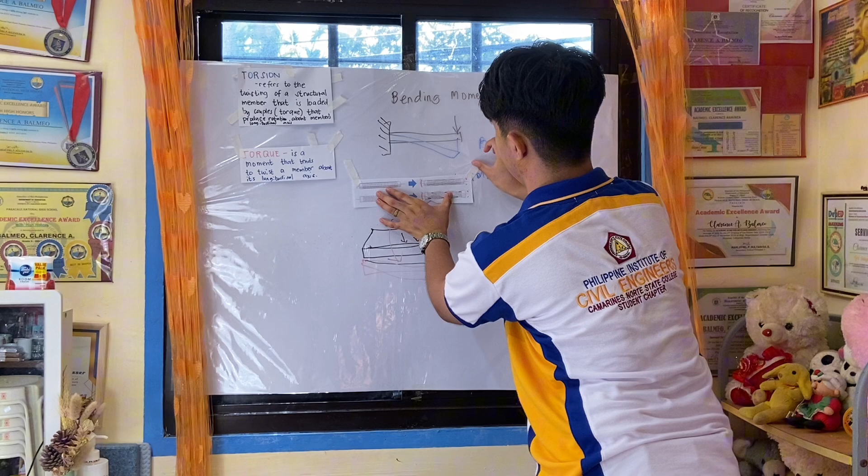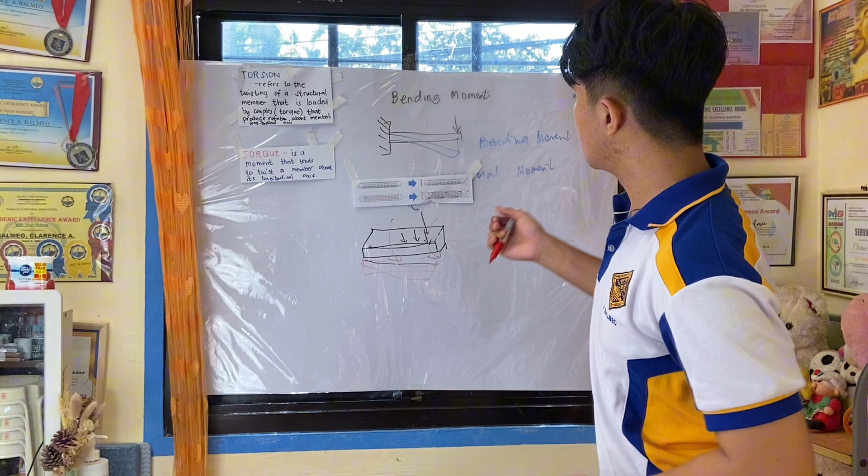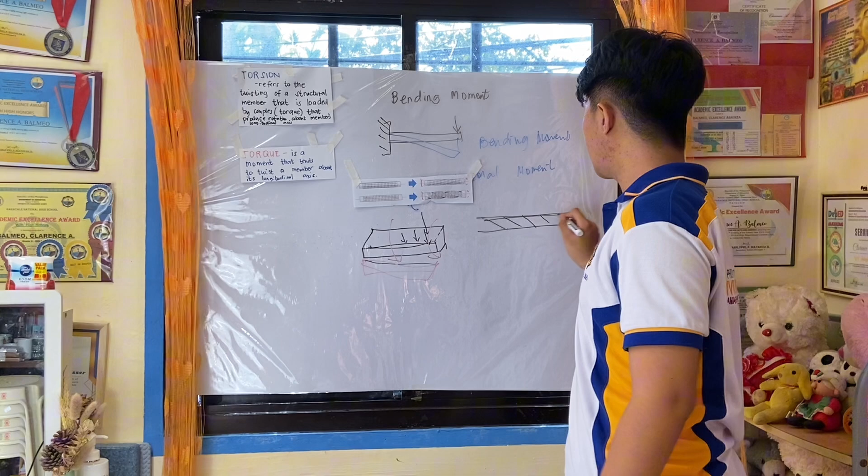As we see in the figure, since it's a circular shaft, when there's torsion or a twisting moment, the lines on it form a helix structure. The lines just become a helix, but the cross-sectional area here is still a circle. Remember that, class, it just becomes a helix, like a DNA strand. See? When we twist the circle, it looks like it became a DNA shape, but it's still a circle.

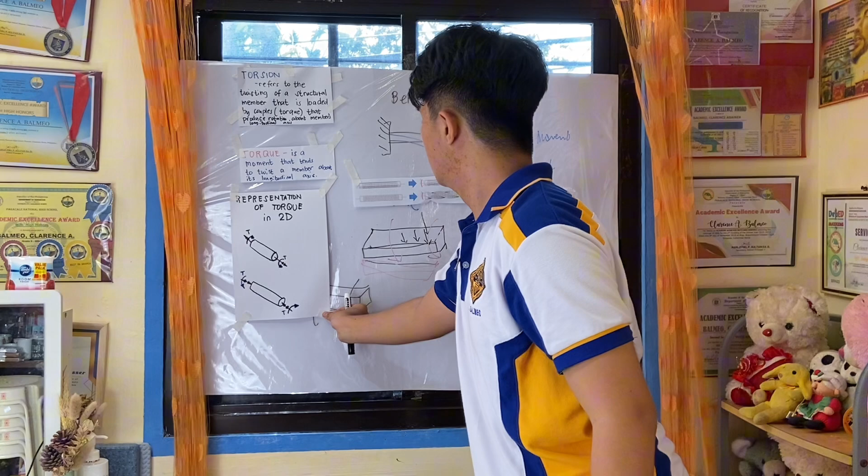So, to represent torque in 2D, here is the image that I will present to you in 2D. This is where the right-hand rule comes in.

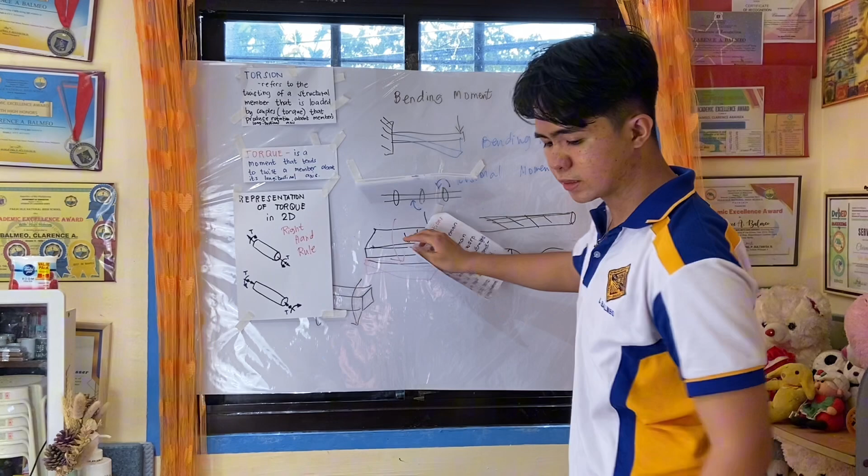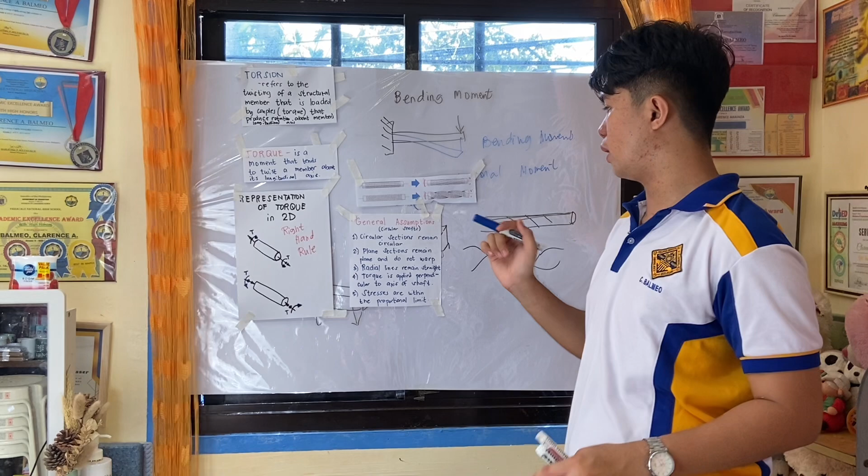Assumption number 2: plane sections remain plane and do not warp. This is similar to number 1, wherein there won't be warping, as shown in this image. So the cross-sectional area of circular shafts won't change.

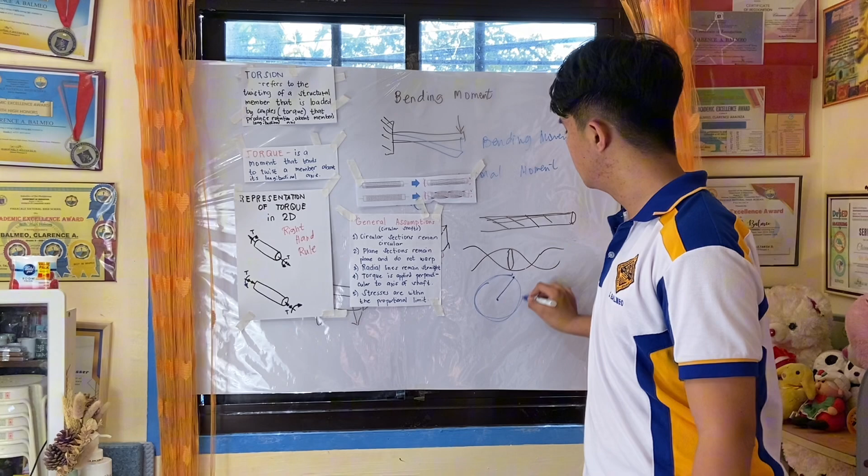Assumption 3: radial lines remain straight. So what are radial lines? This is important later in analyzing the formula. The radial lines, for example here in the circle, go from the center of the circular shaft to its perimeter. From the center to the perimeter, that is our radial line. You know the word radius, right? So this is simply the radius.

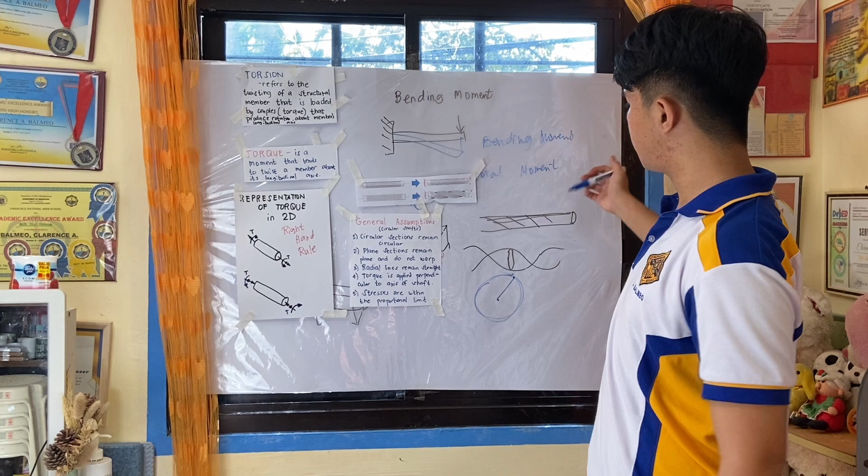Number 4: torque is applied perpendicular to the axis of the shaft. So the torque is applied perpendicular to the axis of the shaft, like this. Perpendicular shaft. And then number 5, stresses are within the proportional limit.

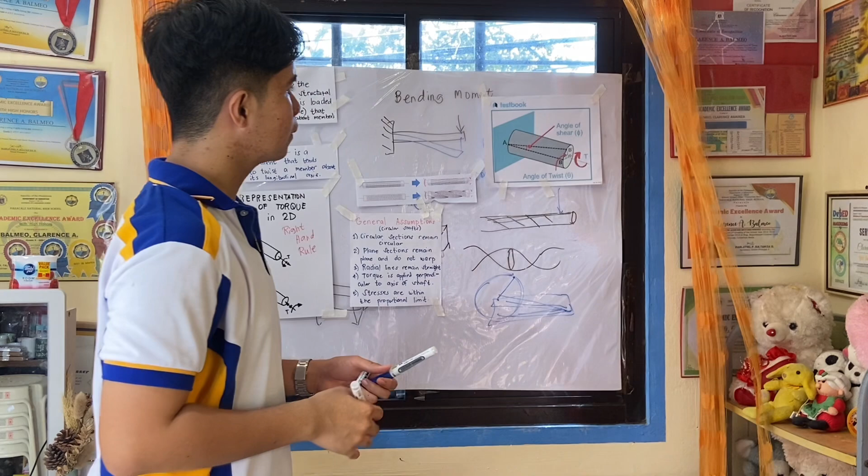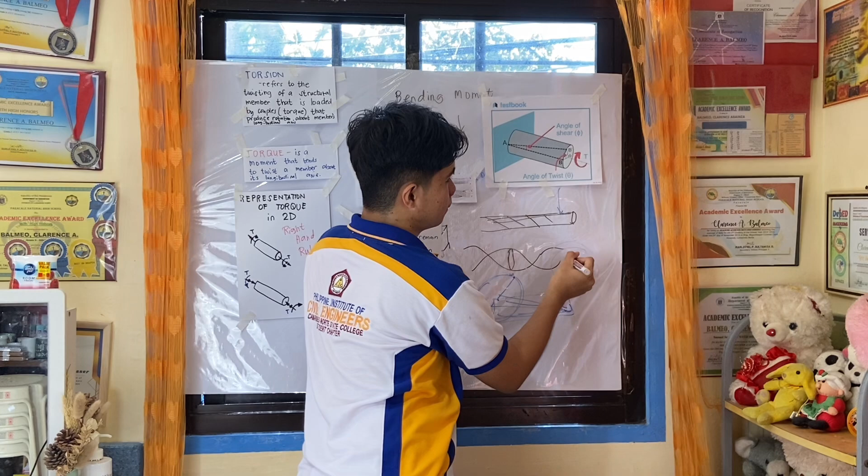To clarify what angle of twist is, here is its formula. Let's open the tape. Here is the angle of twist. Let me write this down. The formula for finding angle of twist is this: Theta is equal to TL over JG.

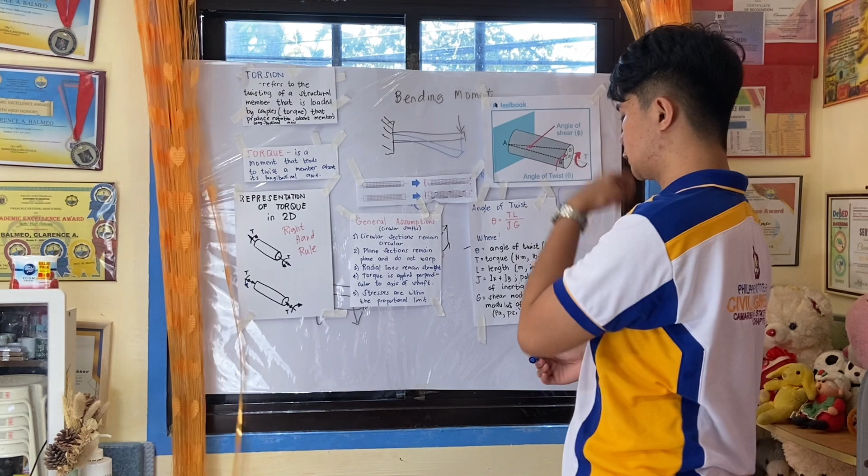To further elaborate, theta symbolizes the angle of twist in radians. So we're looking for the angle of twist - theta is the angle of twist itself, and its unit is in radians, guys. So if your professor asks for degrees, you can multiply it by 180 over pi.

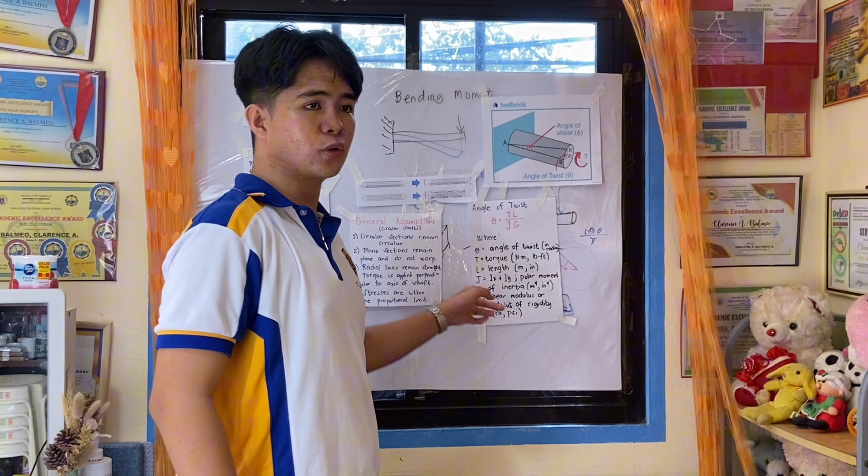T is the torque we discussed earlier. Its unit is Newton-meter or pound-foot. What we'll usually use in our discussion later to get the torque is Newton-millimeter. We rarely use Newton-meter and pound-foot, so we convert to Newton-millimeter.

Length - length is the length of our material, where this torsional force occurs in it. This is the length.

Okay, and J. This J is new to us. It's similar to what we studied in statics - the inertia of cross-sectional area. So Ix plus Iy, this J we call the polar moment of inertia.

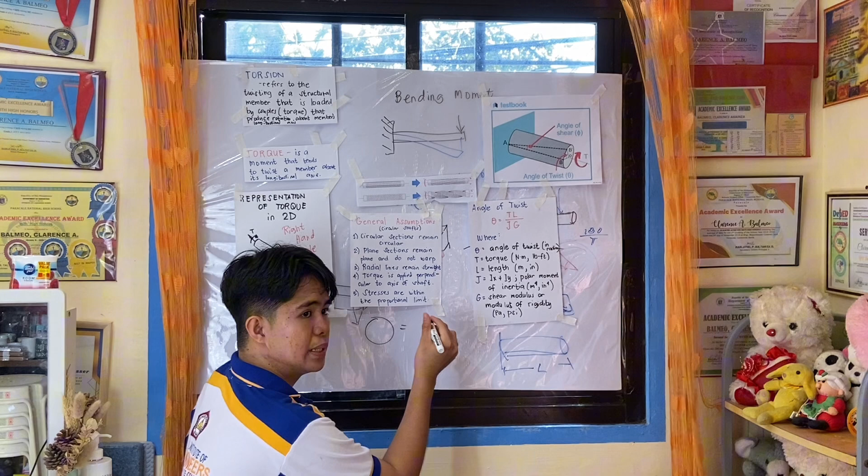So pi r raised to the 4 over 4, that's the formula for the inertia of a circle, that's our Ix. For Iy, since they're equal, same formula, pi r raised to 4 over 4.

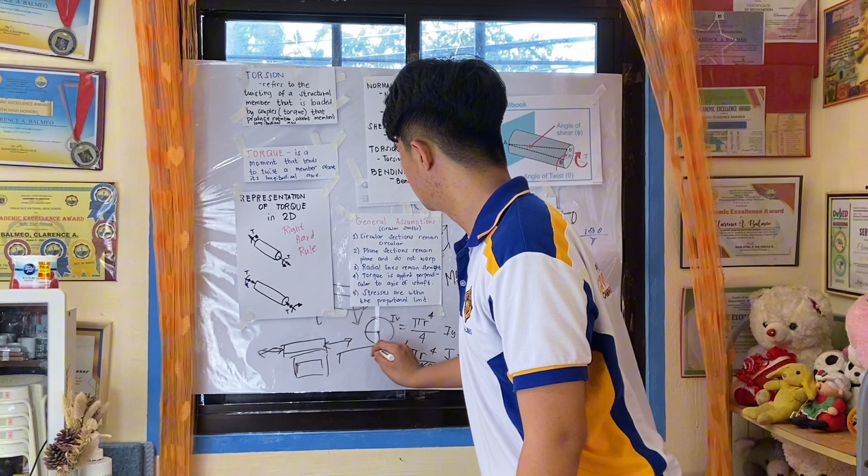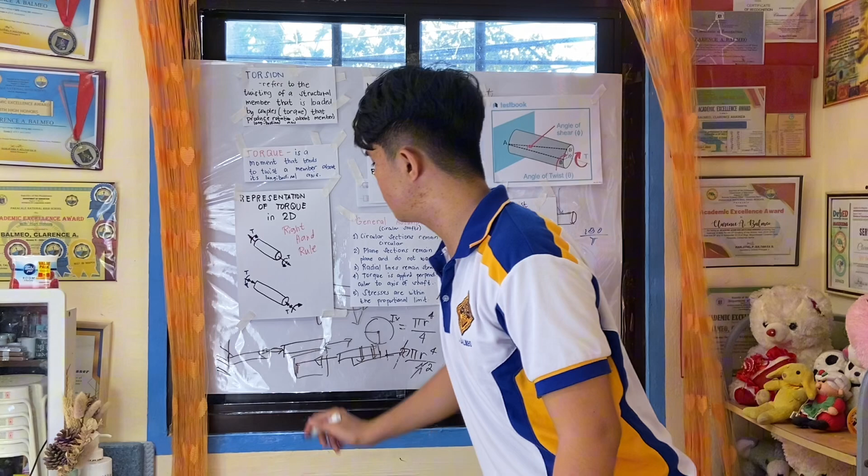While the bending stress, as I discussed earlier, let's review again - say we have a fixed supported beam. It's possible for it to have bending stress, or to have deformation here, let's say deformation on segment B.

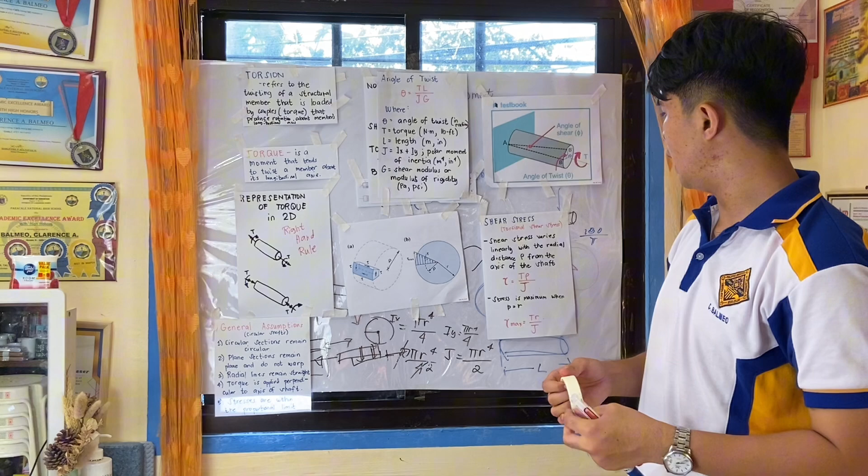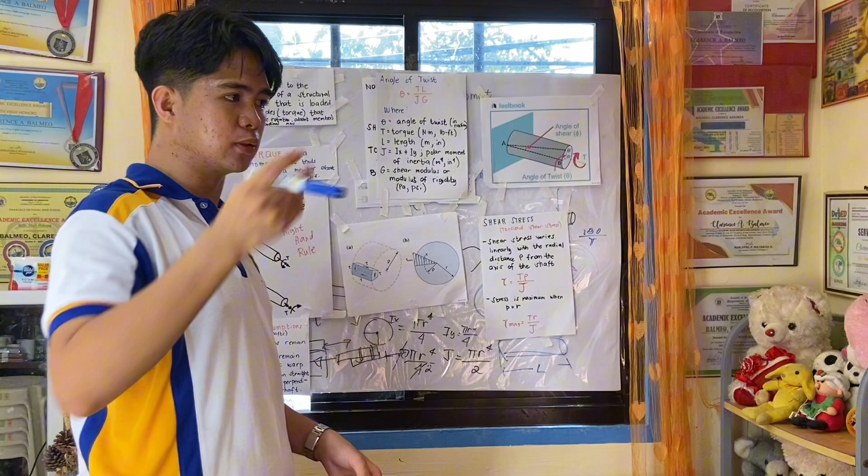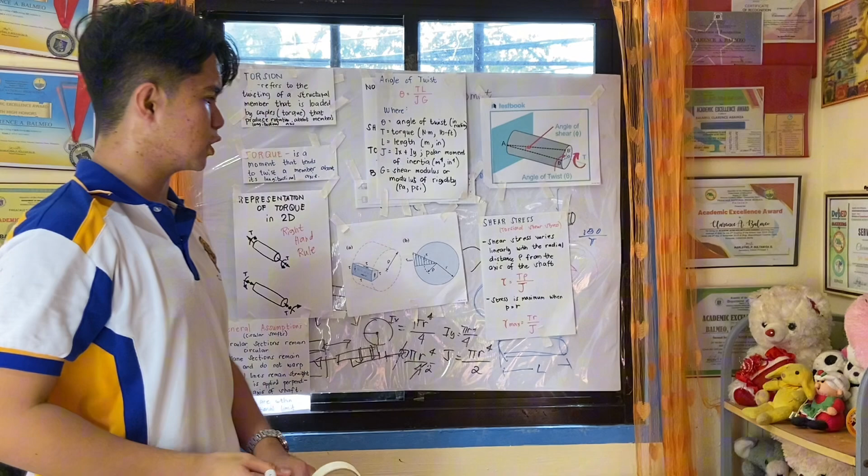Shear stress varies linearly with the radial distance rho from the axis of the shaft. This symbol here is tau. So tau is equal to T times rho over J.

Okay, ano nga ba ito ang ating i-discuss? So ito naman tayo ay yung torsional shear stress na makukuha natin sa isang material.

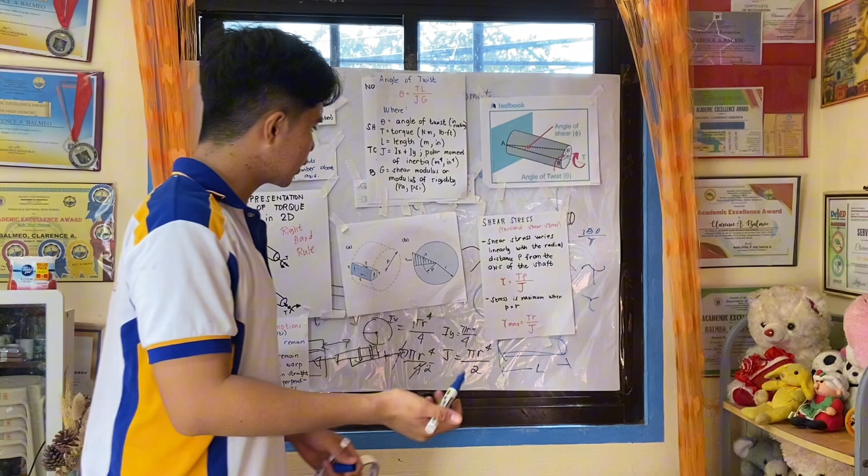Is equal to T, wherein ito yung torque natin. Ito namang parang P is the rho, which is the radius from the circle. Ito yung rho, image pala tayo class. Ito yung rho, diba? Ito yung tau, yung mga lines na blue na yan. So sila yung sinusukat natin o yung torsional shear stress. And then yung J naman natin, didiscuss natin kanina, which is the polar moment of inertia.

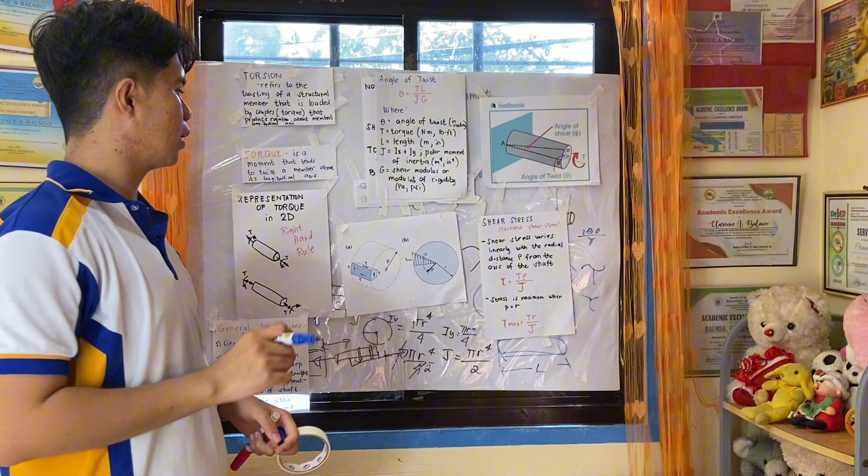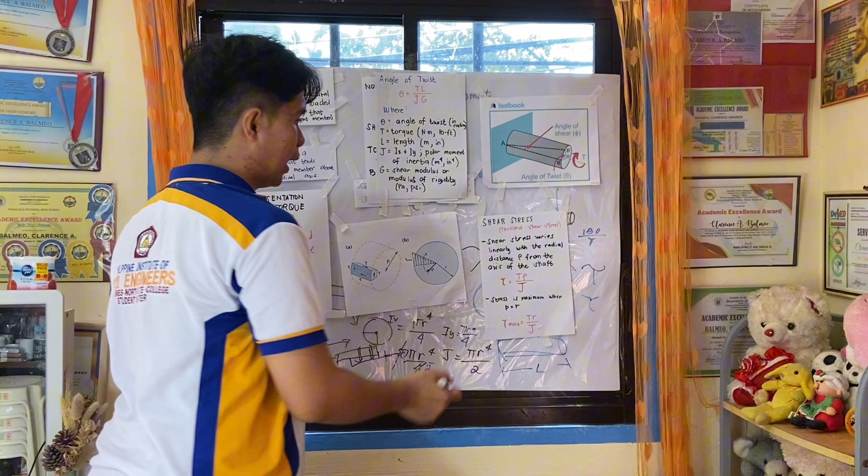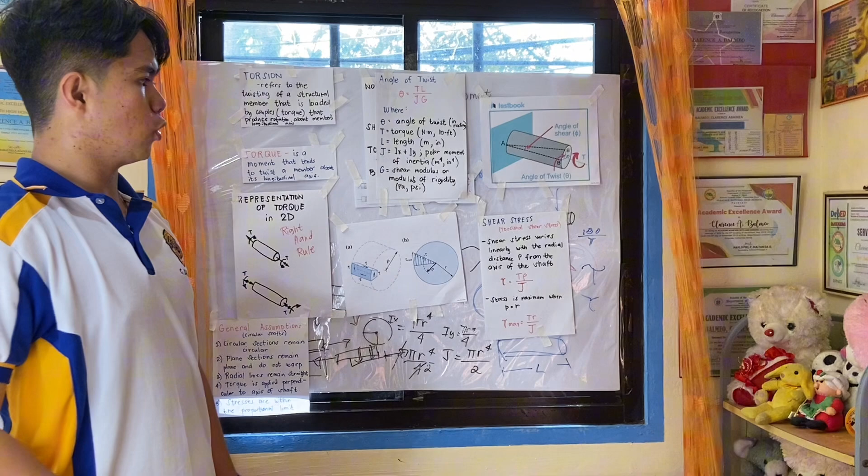Ayan, so kung kukunin naman natin yung stress, stress is maximum when rho is equal to r. Siguro kasi guys, possible na hindi siya, diba ito yung center, possible na hindi siya hanggang perimeter ng circle, or sa edge, or sa side, or whatsoever. So papalitan lang natin sa formula yung rho ng R para sagad siya, and then nakuha natin yung torsional stress, shear stress maximum, o kaya maximum torsional shear stress na tinatawag natin.

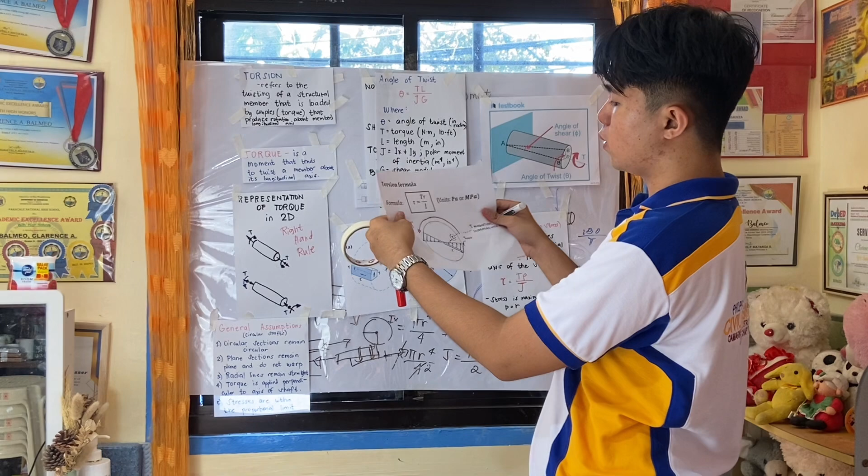Papalitan lang natin yung rho natin ng R. Gets? Okay, ito pa, another representation. Halimbawa ito yung torsion natin, so iikot dyan, diba magkakaroon tayo ng distance from here to here? So yung arrow na yan, yung area nito na makikreate, o yung arrow, diba makikita mo dyan may arrow? Ayan, that is the...

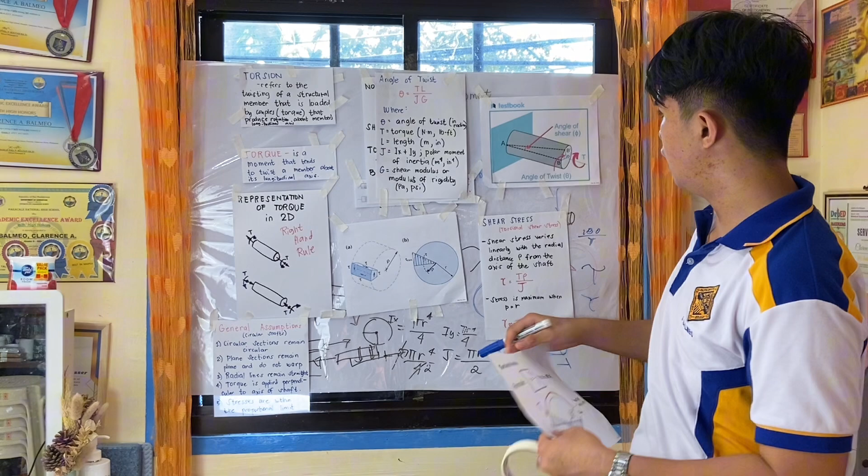Yung maximum stress natin na tinatawag. So makukompute natin to sa formula ito: Tau is equal to T R over J. So yung units nito is Pascal or MPa, or either PSI sa English system unit natin.

Additional lang, last na to na formula before we proceed to answer the three questions from our activity is this. Magagamit natin to sa question number 3 to be specific. Okay? Solid shaft, tapos hollow shaft.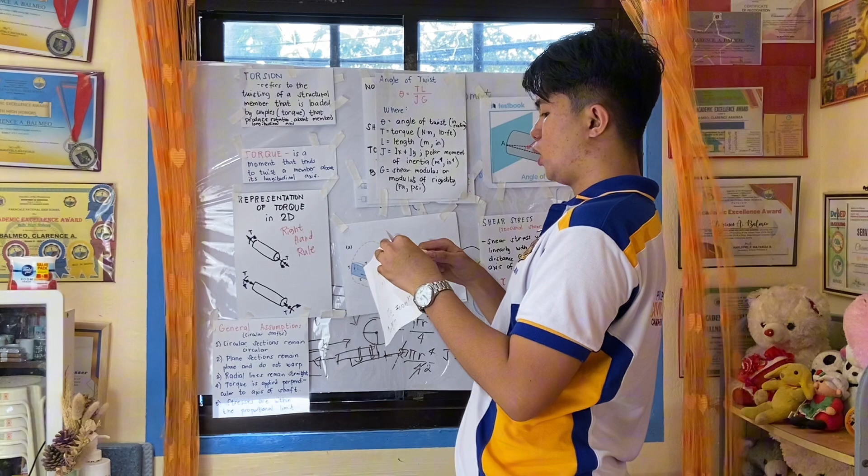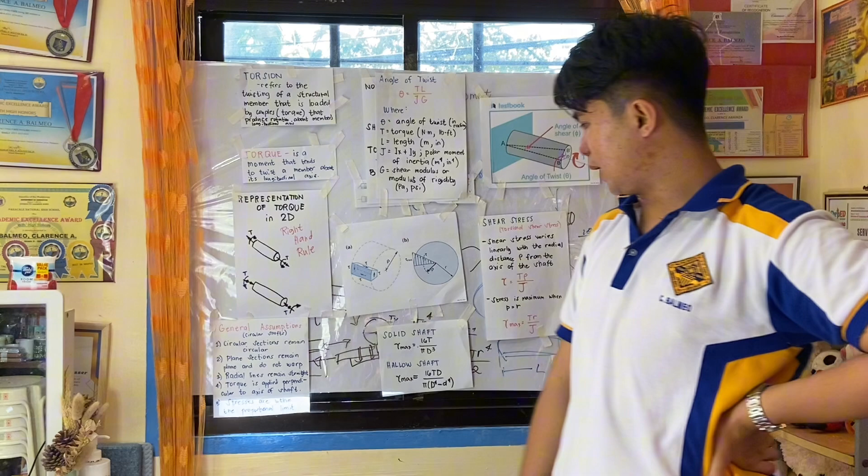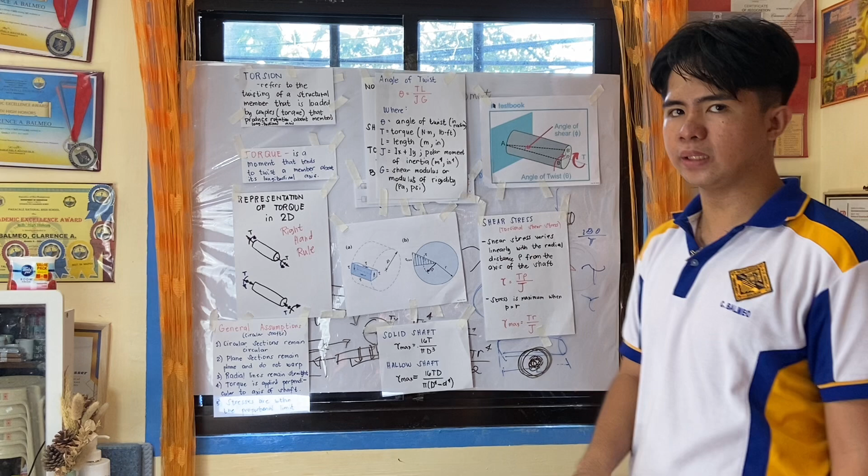Class, kung mabilis yung discussion ko, you can pause my video. Solid shaft, ito yung formula niya. Yung tau max natin is equal to 16 times T, which is the torsion, over pi d, which is the diameter, raised to the 3rd. So sa hollow shaft naman natin, ginagamit natin siya kasi nga minsan yung stress na nararamdaman ng material o ng fiber ng material dito ay hindi na ma-maximize, wherein walang stress doon sa gitna ng material. So nagkakaroon tayo ng parang hollow dyan. Sinusolve lang natin siya in a hollow shaft manner. Parang yung hollow shaft lang ang sinusolve natin dyan.

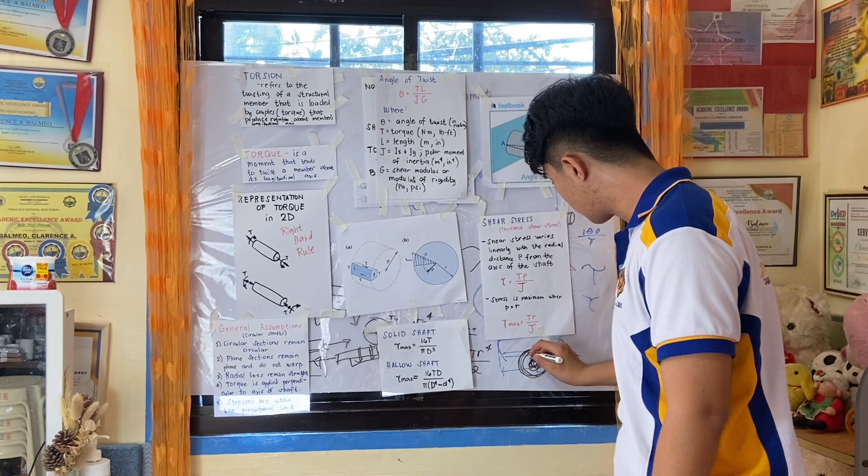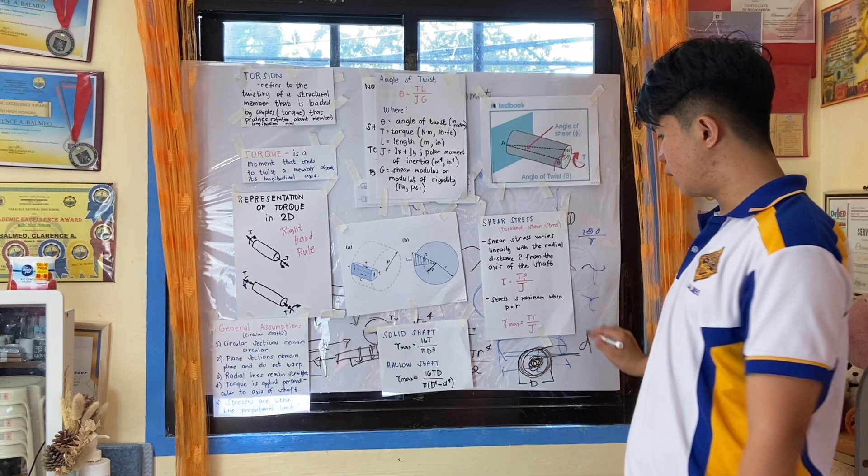So ang formula nun is 16 times torque times D, or the diameter, over pi times diameter, outside diameter raised to 4. Ito yung outside diameter class, is the big letter D. Diameter, and then the d, small letter d, is the inner diameter. Baka kayo malito class, susulat na natin dito for formality, for the sake of our discussion. Yung circle natin, ayan, ito yung big D, which is the outer diameter. Ito naman yung small d, which is the inner diameter. So, natuklasan na rin naman natin sa ibang videos, especially pag ang cross-sectional natin, area natin is circle.

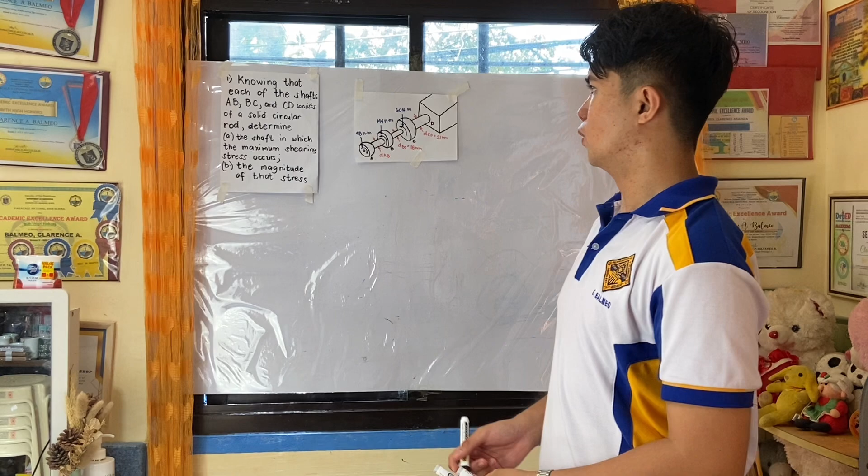Okay class, mag-solve naman tayo ng mga problems using the torsion. So for our activity number 1, knowing that each of the shafts AB, BC, and CD consists of a solid circular rod, gagamit tayo ngayon ng solid circular rod. Determine A, the shaft in which the maximum shearing stress occurs, and B, the magnitude of that stress. Sa video na ito, i-introduce ko sa inyo yung magagawa nating moment diagram na tinatawag. Kanina nagturo ako ng right hand rule kung paano natin gamitin, gagamitin natin yun sa example number 2.

Tapos, ito naman, gagamit tayo, instead of right hand rule, gagamit naman tayo ng moment diagram. Similar lang sila, pero magagawa natin ang diagram. Ginagamit na rin ito ng right hand rule, pero medyo nalilito pa rin ako eh. Maraming nalilito sa right hand rule, okay? So didiscuss ko na lang siya mamaya sa number 2.

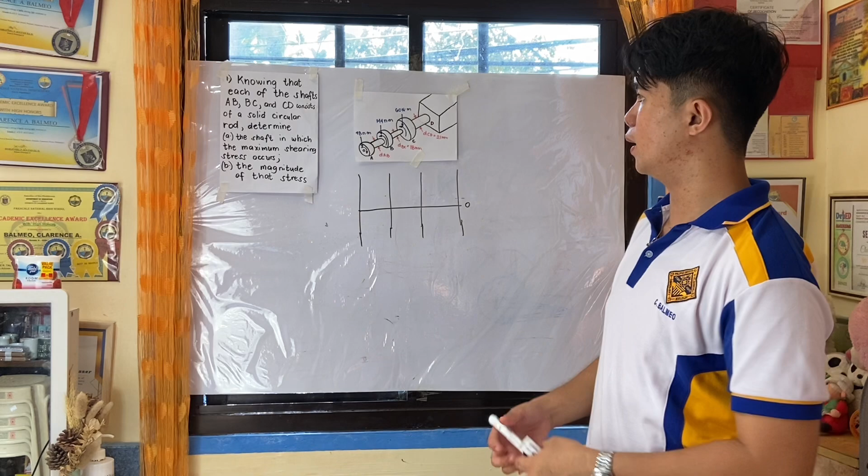Okay, right hand rule. So ito yung parang, ayan, zero natin. Mag-a-assume tayo na counterclockwise natin is positive, sa una lang to class. Magsiset tayo ng standard sa unang rod. Ayan, rod okay? Gagamit tayo ng blue pen. Meron daw tayong 48 Newton-meter na stress dito sa unang rod.

Wait lang class, ang hinahanap natin is the shaft in which the maximum shearing stress occurs, tapos B, the magnitude of that stress. Mahanap natin yon using the formula kanina, pero kailangan muna nating hanapin yung shear stress nila using this moment diagram. Okay? 48 Newton-meter, since clockwise siya, i-assume natin na pag clockwise is positive. Tataas siya, 48.

Wait lang class, balikan natin. I-assume pala natin class na pag clockwise is negative. Negative siya class ha, negative. Bababa tayo dito ng 48, negative 48. Assume that counterclockwise is positive.

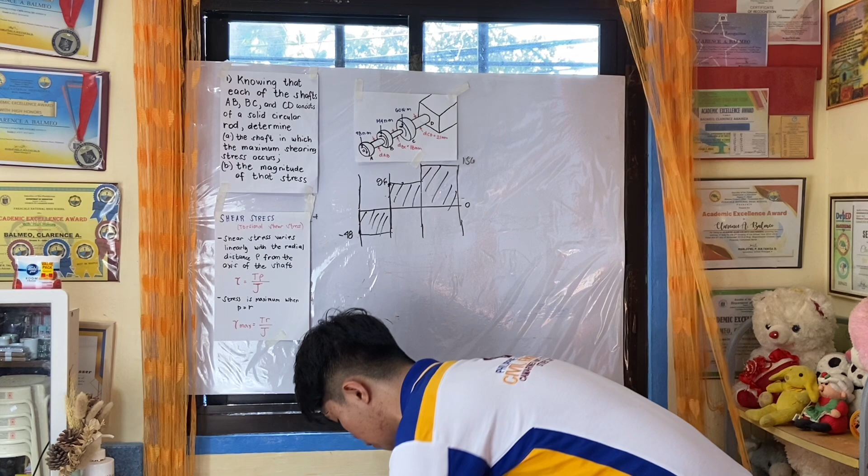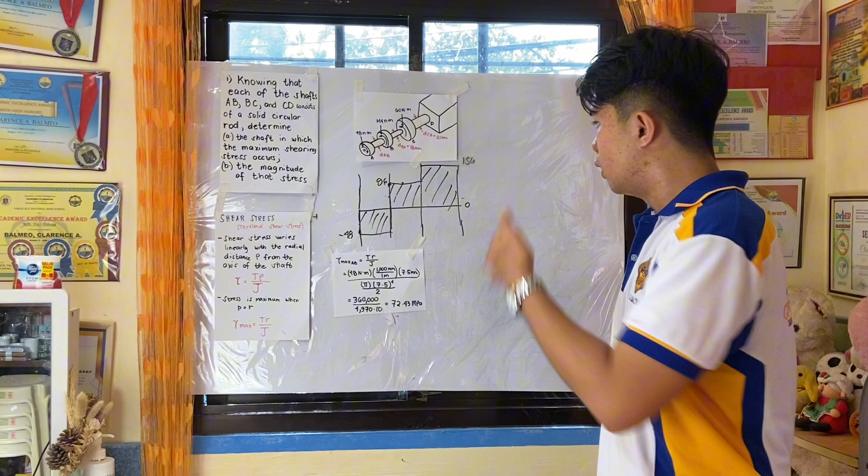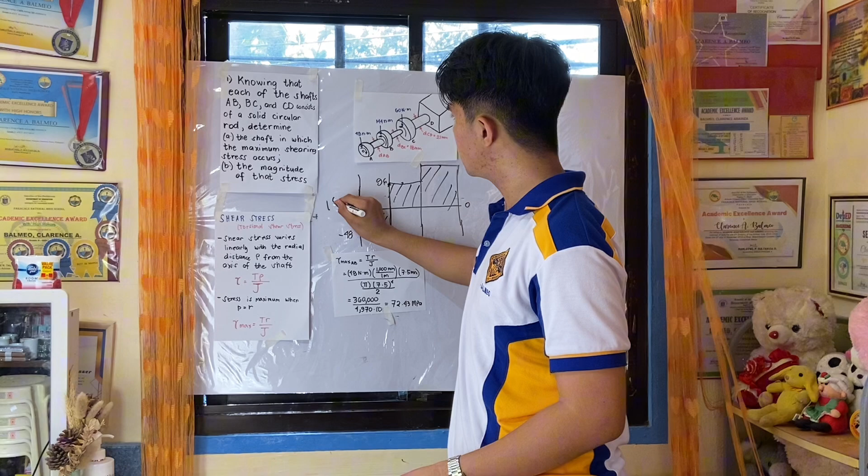For A, class makinig. Tau max or the torsional shear stress, maximum torsional shear stress is equal to T torque times radius over J. Yung J natin, na-discuss ko na kanina, which is pi times the radius. Yung radius ng cross-sectional area natin, which is the circle, dito tayo sa AB. Ang radius natin dyan is 7.5 dahil 15 yung rod AB.

Hindi ko lang nasulat pero 15 yan. Di ba nakuha natin kanina is 48? Gagawin natin siyang positive or absolute value. 48, tapos i-convert natin yung 48 Newton meter sa Newton millimeter, kasi para maging megapascal yung kakalabasan ng solve natin, kailangan naka-millimeter lahat ng values. Times the radius, 7.5 millimeter. Tapos I have already discussed the J is equal to 360,000 over 4,970.10, so ang sagot natin sa rod AB is 72.43 megapascal.

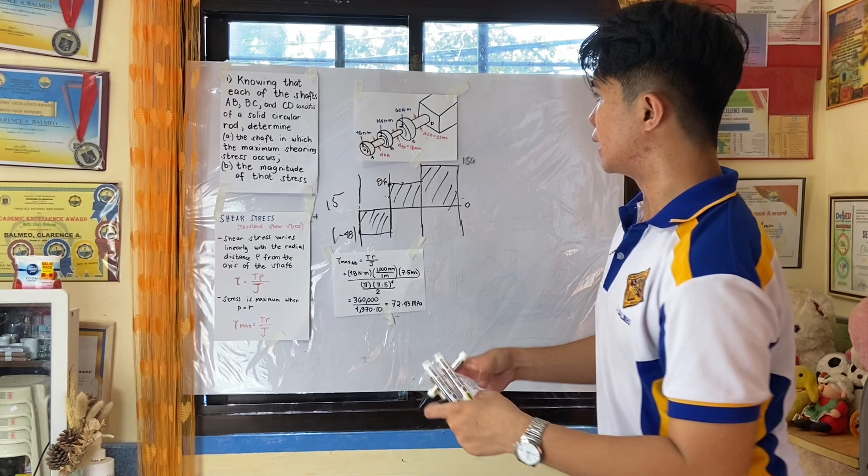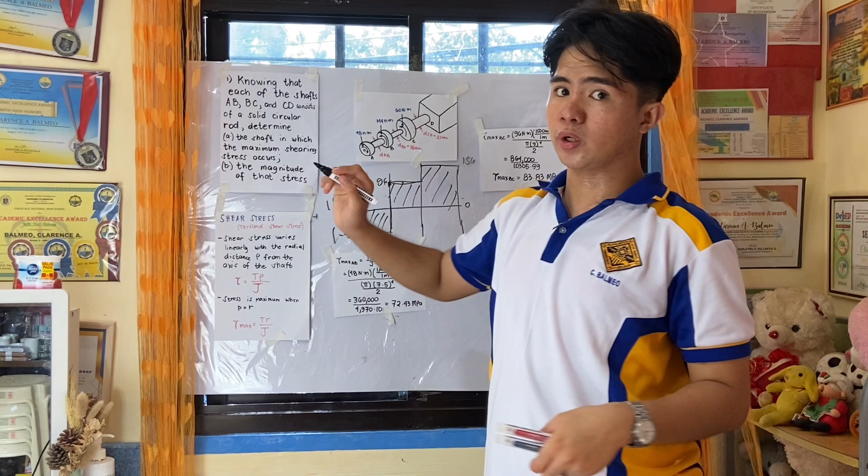Discuss naman natin yung rod BC. Sa rod BC naman, class, here is our answer. The maximum torsional stress sa rod BC, ang torque natin here is 96. Nasolve natin siya kanina, nagawa tayo ng torque diagram gamit yung moment here.

So 96 times 1,000 millimeter over 1 meter, nag-cancel pala sila class, kaya nakansel. Kinonvert natin siya sa millimeter for the sake of our discussion and for the simplicity of the units, para maging similar sila, times 9 millimeter, which is the radius of the 18 millimeter diameter, over pi times 9 raised to 4 over 2, so equal to 864,000 over 10,305.99. Yung maximum torsional stress natin sa BC is 83.83 megapascal.

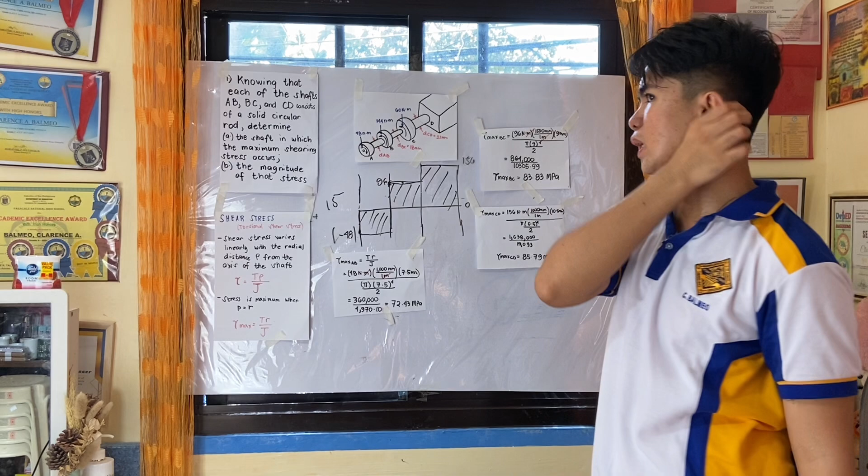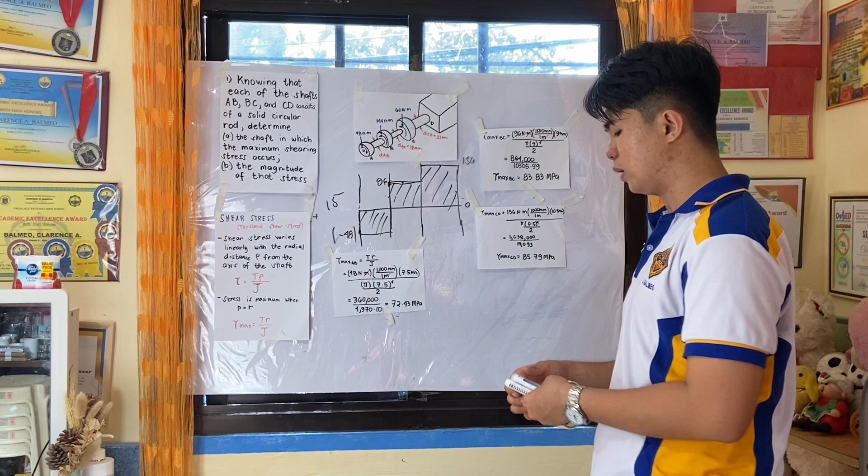Lastly, sa ating rod CD, ang rod CD natin here. Ang ating torque sa rod CD na kuha natin kanina gamit itong torque diagram - hindi pa ito moment diagram, torque diagram pala ito, torque moment diagram or whatsoever - so 156 Newton meter, i-convert natin sa millimeter, mamultiply tayo ng 1,000 millimeter over 1 meter.

Times the radius, 10.5 millimeter, wherein 21 millimeter kasi yung diameter dito, dito naman AB is 15 millimeter, nalimutan natin kanina. Over pi times 10.5 raised to 4 over 2. 1,638,000 over 19,093, so yung torsional stress natin sa CD is 85.79 MPa.

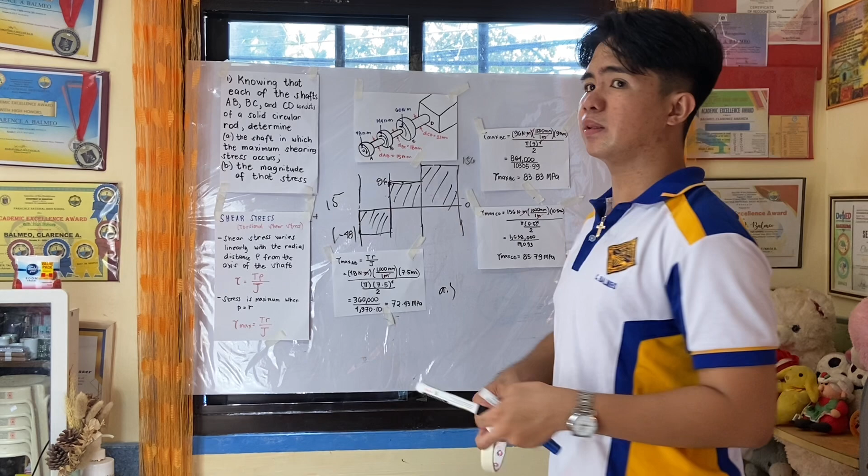Masasagot na natin yung tanong natin sa A at sa B. Para sa letter A, ang tanong natin is the shaft in which the maximum shearing stress occurs. Ano nga ba yung nakakuha na maximum shearing stress? Sino yung may pinakamataas dyan - si rod AB ba, rod BC, or rod CD? Syempre nakikita na natin na si rod CD yung may pinakamataas, so ito yung sagot natin sa letter A.

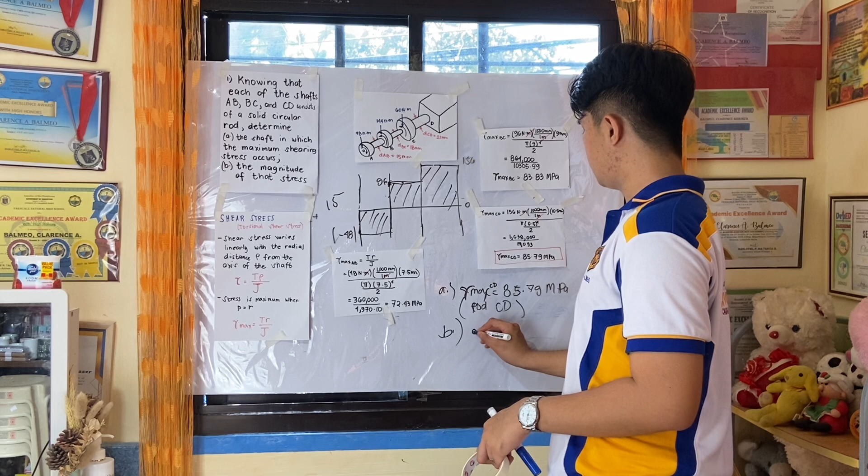Ito yung tau max natin, susulat natin dito for the sake of discussion. Tau max na hinahanap natin is equal to 85.79 MPa, rod CD. Ang tanong naman natin is, what is the magnitude of that stress? Syempre 85.79 MPa.